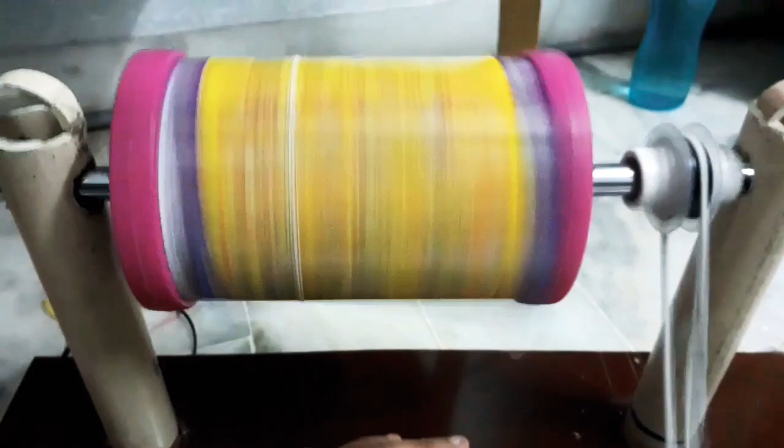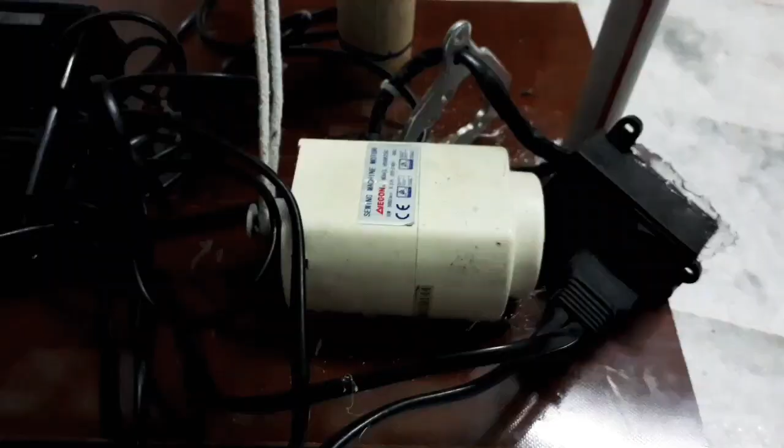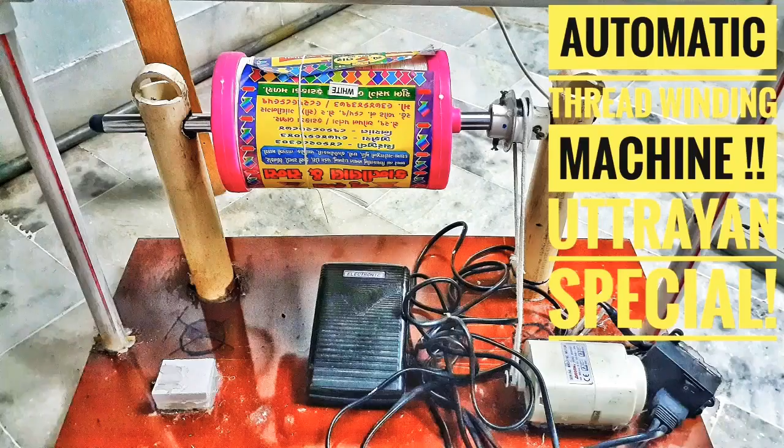Hello and welcome back. As you all know, I take every festival or special occasion as an opportunity to make stuff out of electronics, to make life easier for myself and for you. So on this festive occasion of Uttrayan, I came up with an interesting mini thread winding machine which makes your life easier as you don't have to go through the cumbersome process of winding thread on your own, because the machine does it all. In this video, we'll delve into the process of building this thread winding machine and understanding it. Let's get started.

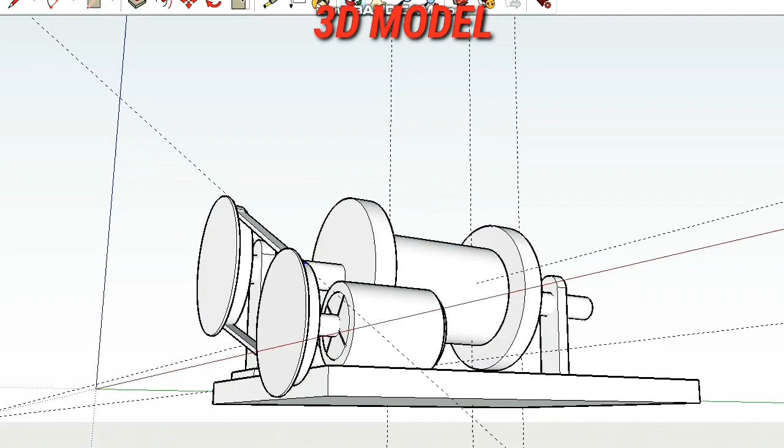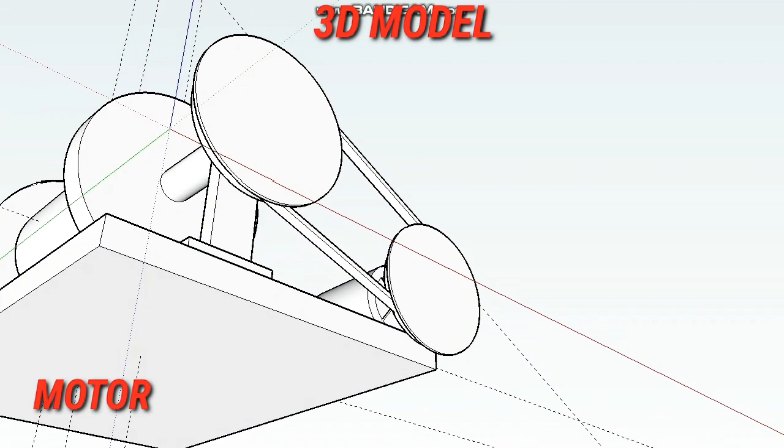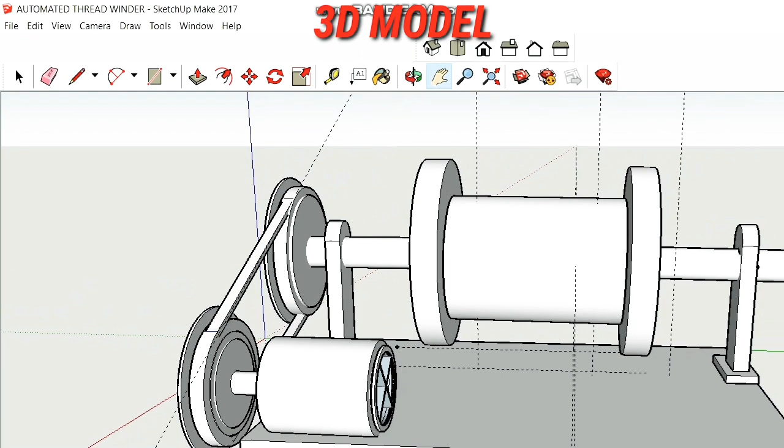First, let's start with the 3D model which I designed a while back. The base should be firm so it can withstand the necessary load and not collapse while performing its task. The main parts include a motor, which is crucial as it rotates the bobbin or thread holder, two supporting barriers for holding the bobbin in place, a conveyor belt or timing belt which transmits motion from the motor to the thread wheel, and a circuit for controlling the speed of the motor according to our convenience. Later, while building the thread winder, we will also add a holder for lifting it.

After looking at the model, let's start building it. To start with, I took a shiny good-looking fiber sheet of around 3.6mm thickness and a length of around 55cm so that everything fits inside it perfectly without any trade-off or excessive margins.

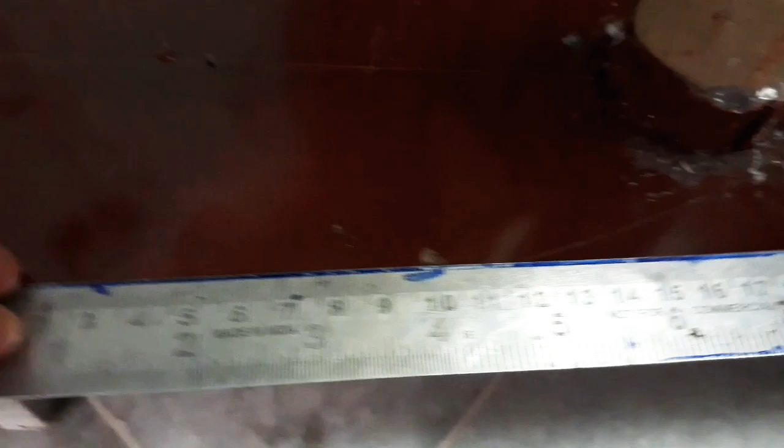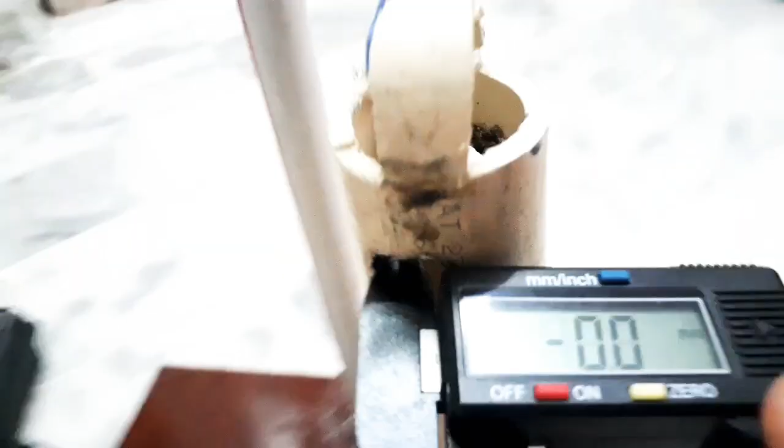Then I took some thick PVC pipes of around 40mm diameter as the barriers for holding the thread winder, with a height of around 50cm or half a meter, which are quite sturdy for this purpose. I drilled two holes at a distance of around 35cm from each other and inserted the two barrier pipes, fixing them together using a bit of force and a bit of glue. After that, I drilled another two holes inside the barrier pipes for holding the bobbin in place.

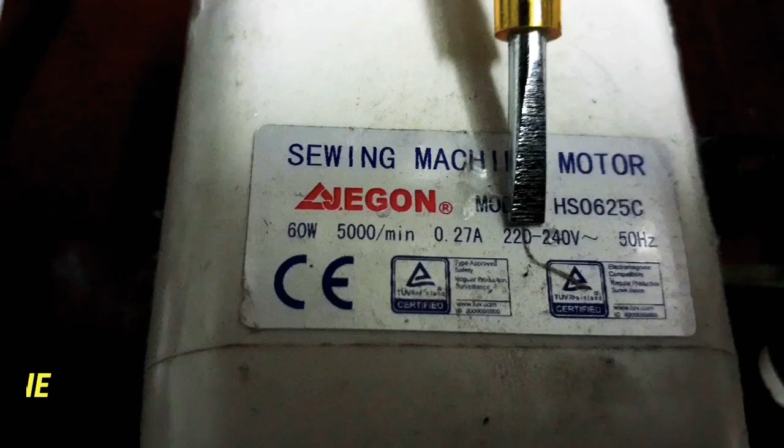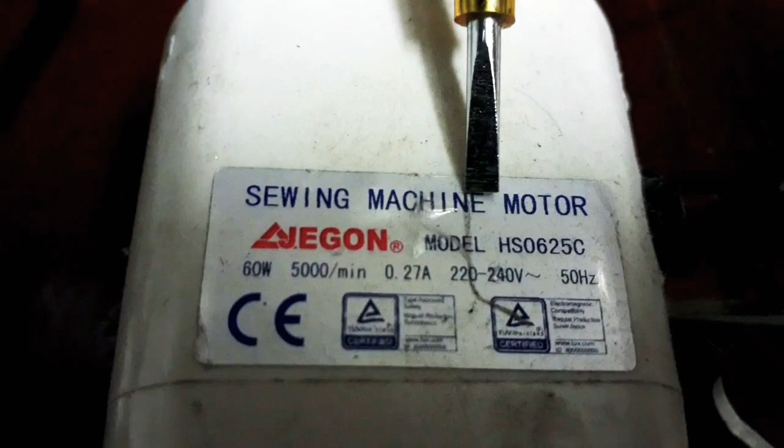Now it's the advent of electronics. I salvaged a sewing machine motor from an old sewing machine which I had laying around and was quite useless. The specification tells us it runs on AC power instead of DC. The rating says it runs on AC mains, 220 volts, 50Hz frequency, which is by default our main supply in our homes. It consumes a current of about 270 milliamperes and a power of around 60 watts, and runs at a speed of 5000 rpm, which sounds more than enough for our purpose.

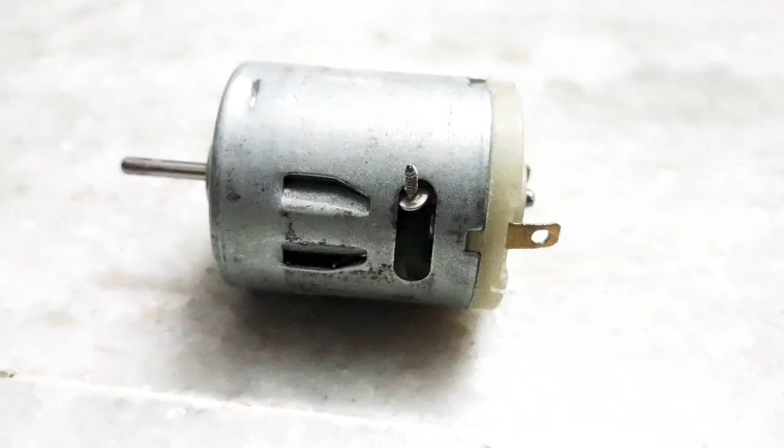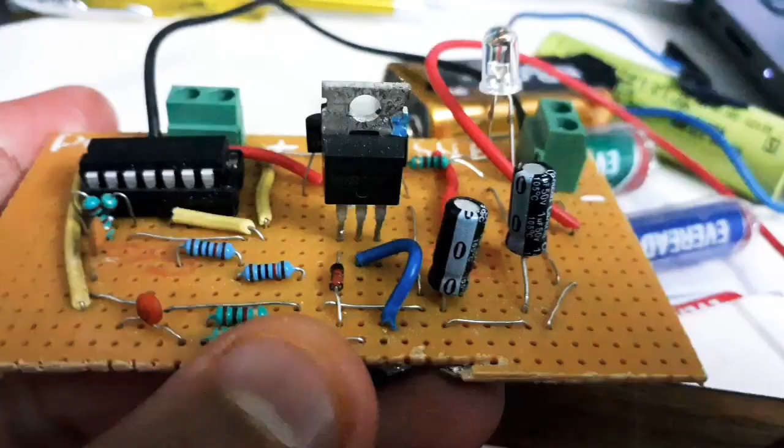So now there was a problem - we can't use an AC motor on DC supply using batteries, or filtered AC and design our own PWM control using some circuitry which I designed a while ago. But we will explore that in the next video and learn about its working and calculation, so stay tuned.

But wait, we can use a foot pedal which I also salvaged from the same sewing machine. But there was one question - what's inside a foot pedal? Anyway, that's a topic for another video which I'll cover in future. But in short, the foot pedal varies the speed of the AC motor by increasing or decreasing the current entering inside using a pot.

After fixing the motor in place, I took a conveyor belt or timing belt, joined it together and kept it for drying. Now it was time to make a coupler or fixture for holding any bobbin rod in place without slipping off. So I took a coupler, basically used for joining two PVC pipes, but this works here. Then took some spacers in which we could fit the screws, tightening them according to the diameter of the bobbin rod, which serves the purpose.

Drilled 4 holes, inserted the spacers inside, glued everything together, added some screws to see if it works, and yes, it does work. Then took a bobbin or thread holder and fixed it inside the coupler we built recently.

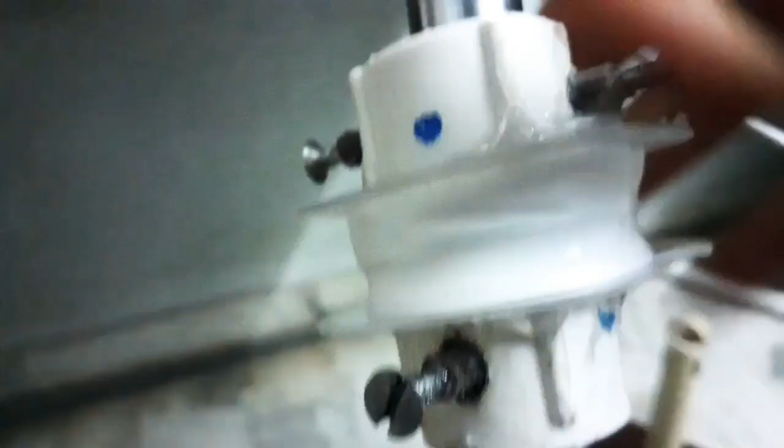As we talked earlier, there should be a stand basically to lift the thread winding machine. So I took two PVC pipes of around 20mm diameter and a height of 45 centimeters, took two 90-degree couplers and fixed everything together, and placed it on the fiber sheet. And our mechanical build was complete.

Now it was time to test it. So I plugged the cable to the 220 volts main supply, added the conveyor belt to the two shafts, tightened everything and checked if there was any problem. And guess what? It was working perfectly.

There are some flaws, like winding the thread equally around the surface of the bobbin, which you have to do manually. But I am currently working on it so that it becomes fully automatic, which we will cover in future videos. As you can see, when the pedal is pressed harder, the speed of rotation increases, which increases the winding speed because it receives more power. So all in all, this works perfectly and saves you a lot of time.